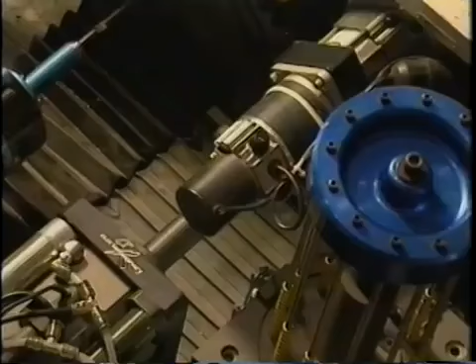It would be one of the most complex machines ever built. It would take 10,000 people and nearly 5 years to build it. It would cost an estimated $5 billion. Success was anything but certain. The plane would contain more than 4 million parts, supplied by contractors around the world.

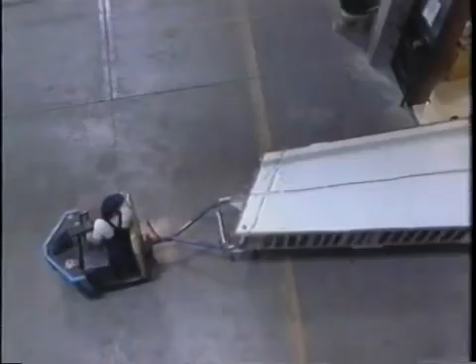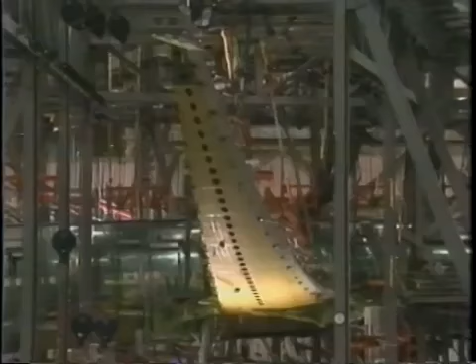To make it all work, the company would reinvent itself from the inside out. And all of this would have to happen at a time when the world's airline industry was in recession. If the 777 were to fail, the company's future was at risk. Success would keep Boeing ahead of the competition for decades to come. This plane would be built to set a new standard for commercial aviation. This is the story of the building of a 21st century jet.

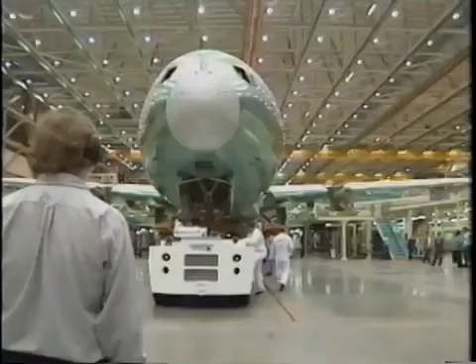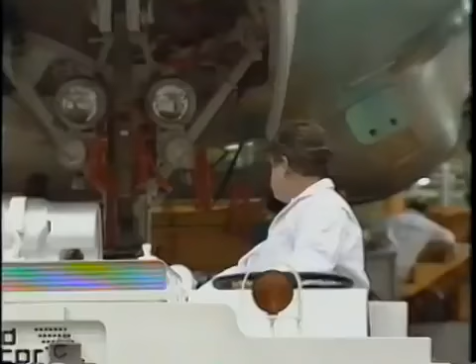1993 had been the year of assembly for Boeing's new airliner, the 777. In the space of a year, a whole plane had come together in the factory. By January of 1994, the plane was moving for the first time on its own wheels. It was a delicate operation. A team of wing walkers made sure the tow driver avoided bumping into walls, tools, or other aircraft. Because I can't see the end of the wing tips. If I get close to something, they'll let me know, warn me, or we have to back up and try again.

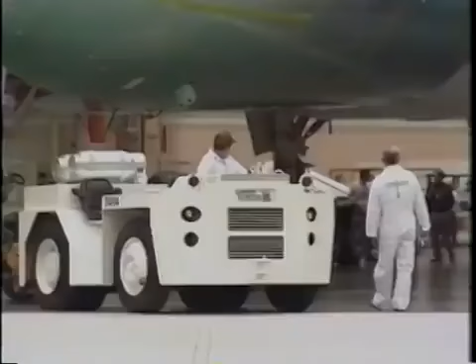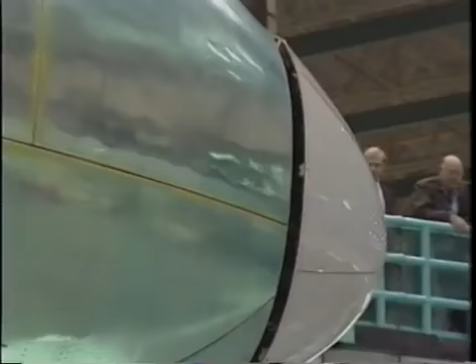Boeing had so far received orders for 140 planes. They hoped the 777 would ensure the company's commercial success well into the 21st century. But no 777 had yet flown. This one would be the first, and there were only 5 months to go before this aircraft would take its first flight. It would be 5 months of pressure, stress, and shifting deadlines.

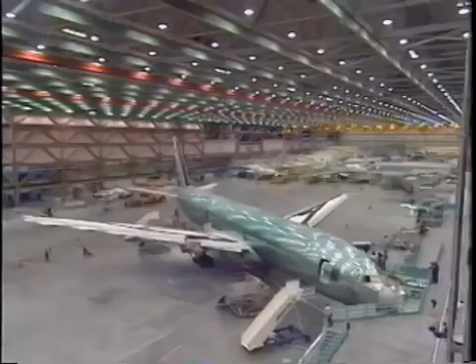This plane marked a change of direction for Boeing. It had been built with the latest technology, new flight testing, and a pioneering new management philosophy. Now, the plane was ready for those who would prepare it for its first flight. Now that a space had been vacated, the number 2 plane would be moved into position for assembly, followed by other planes farther down the line.

There was one important component still missing from the plane. In fact, 2. The engines. They were being designed and manufactured by other companies and would be brought to the plane just a few weeks before rollout. Boeing makes airplanes, but they don't make airplane engines. That requires a technology all its own. Pressure to design and test the 777 engines would dominate the run-up to the first flight.

Granville Frazier was the Boeing executive responsible for working with the engine manufacturers. Raised on a farm in Mississippi, he was known to his colleagues as Granny. Did it change anything from the meeting we had this morning? When I used to go back home and visit my relatives who are still either working factory-type jobs in the city or still work on the farm and actually grow cotton and corn and things like that, they used to ask me, and I'll try to lapse back into my childhood accent, they say, "Granville, what you do out there at that Boeing?"

And I'd say things like, well, I manage the business and technical interfaces between the Boeing Commercial Airplane Group and the various engine companies, Rolls-Royce, Pratt & Whitney, and GE. And invariably they'd say, yeah, but what you do? I finally learned to answer the question, I make airplanes. And they say, oh, you're a riveter or a welder? And I told them my job is more like welding.

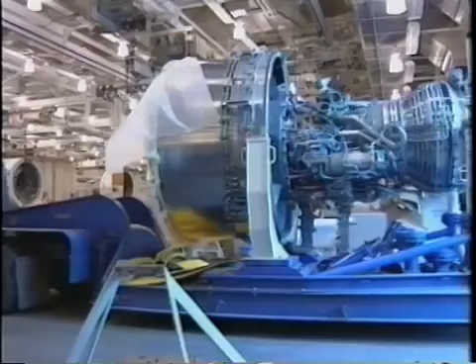And so you have a lot of communication. You could hear somebody say that occasionally. Granville's got a nice job out there at Boeing in Washington State. He's a welder. Welding relationships with the engine manufacturers was Frazier's main task. It would require all of his tact and skill to keep the engines on schedule. The first plane to go into service with United Airlines would have engines made by Pratt & Whitney.

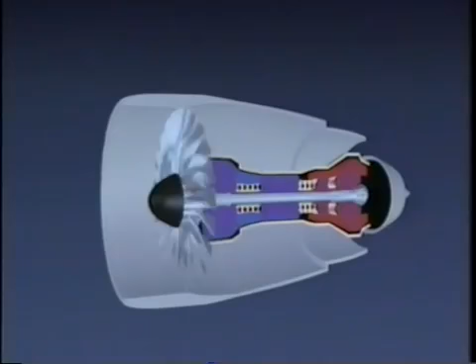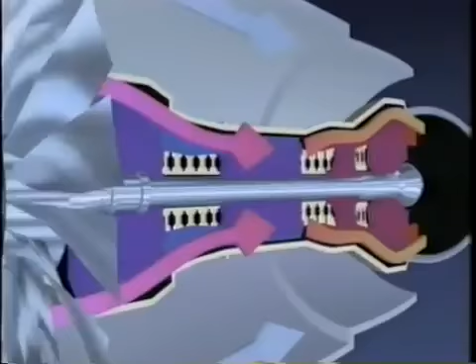According to engineers, a modern jet engine works by a process of suck, squeeze, burn, and blow. Air flows in at the front end through a series of rotating compressors fixed to a shaft. When the air pressure has increased about 20 times, it's heated in a burner at the back.

The hot air rushes out, turning the turbine blades, rotating the shaft at high speed, and spinning the front fan. This pulls the plane through the air like a propeller, except much more powerfully. The design of the new engine produced fierce technological challenges.

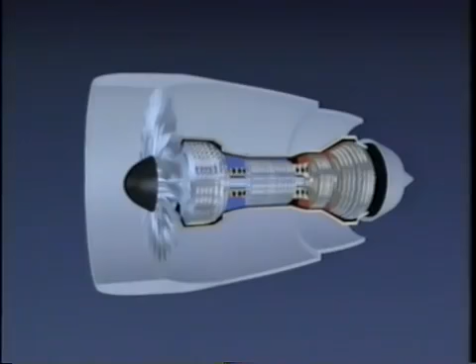I don't remember how many parts there are in an engine, maybe 50,000. And they whirl in a circle with tip speeds on the fans that are transonic, with turbine materials that are running at sufficient temperatures that they're running cherry red, and they all fly in formation with the airplane. The propulsion system, including the engines, is maybe 25% of the price of an airplane. It's a big chunk of it.

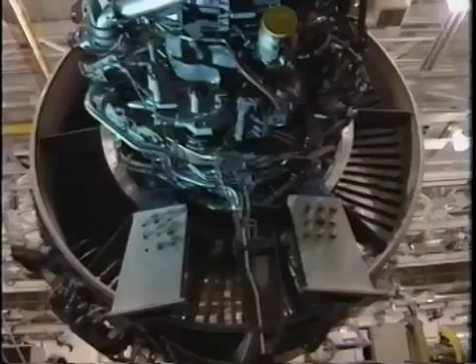There were 3 companies making engines for the 777: Rolls-Royce, GE, and Pratt & Whitney. It would be up to the airline to choose which manufacturer they went with on their airplanes. As with the rest of the plane, the engines were designed using a 3-dimensional computer. Every component stretched the limits of technology. The contours of the fan blades, for example, were angled to within 1/3 of a degree.

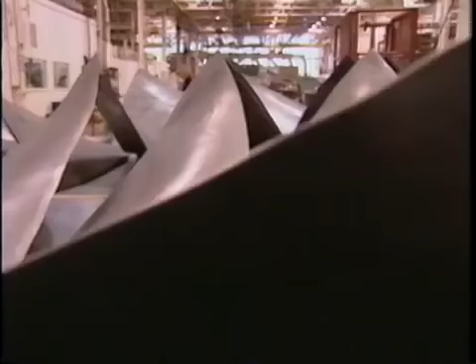Because the outer portions would move fastest, they would have to be larger to take in the same amount of air as the slower parts of the blades near the shaft. A steady and even airflow throughout the engine was crucial.

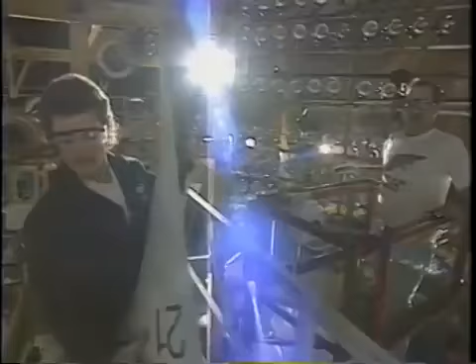As the core engine was designed and half a dozen prototypes built, Pratt began a test program that put the engines into test chambers where they would run for many hours under simulated flight conditions. Pratt used low-pressure altitude chambers and wind tunnels where engines could be run at full thrust in situations that simulated normal and abnormal flight.

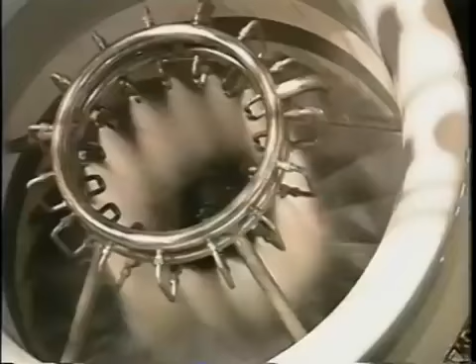The engines would have to be able to survive the onslaught of everything from large chunks of ice to torrential rain, rain falling at the equivalent of 28 inches an hour. Bird strikes had caused crashes in the past, so the engineers fired flocks of small birds, dead ones, at the engine, escalating to birds weighing as much as 8 pounds.

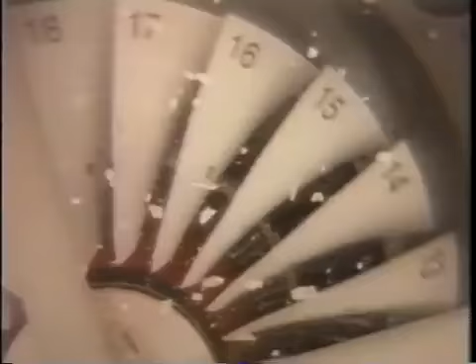The more dramatic tests took place in specially constructed indoor test laboratories. But Pratt & Whitney also had an outdoor test facility for running engines for weeks at a time at high thrust. It was in a location where it wouldn't disturb the neighbors.

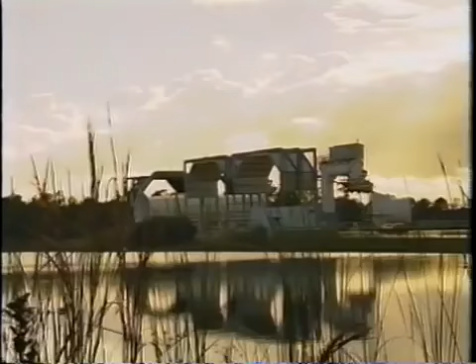When you go into reverse, you kick up a lot of sand and dirt, and you just tear up the test stand. So we run it outside for that reason. That's the primary reason. And the other secondary reason is that you don't wake anybody up out here when you're running all day long.

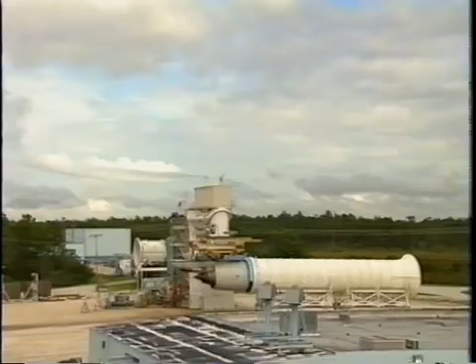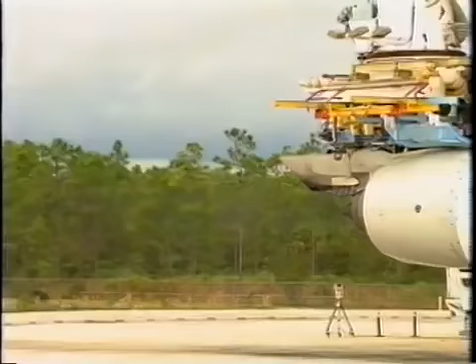These regular cycles of engine activity were designed to reveal problems related to fatigue or vibration that might occur once the engines had been running for a year or two in regular airline service. When an engine had to be shut down in flight, it was often because some small component had broken, leading to the plane having to land at the nearest airfield.

Over 50% of engine shutdowns had nothing to do with the core engine, but were the result of failures in the sensors or tubes around the engine. During these tests, the engineers deliberately changed the distribution of weight in the engine to put it off balance. This simulated the sort of vibration an engine might experience after years of wear and tear. After regular cycles of activity, engineers went in and took the engine apart.

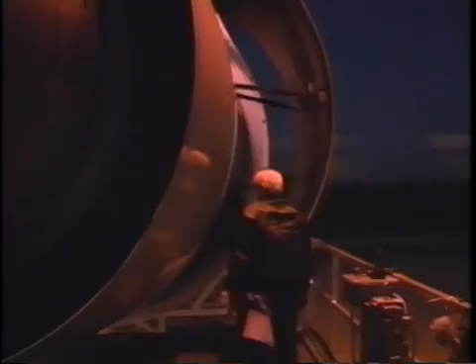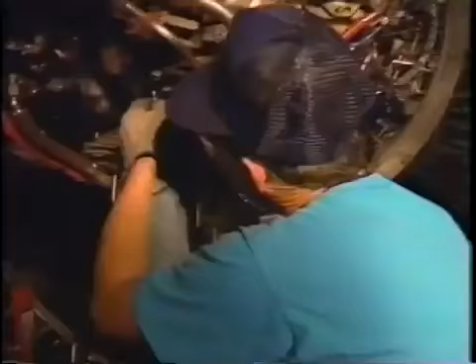And then on this side here, there's two other spots. They hoped not to find too much wrong, since these components had all been designed to resist the effects of vibration. Scott Hadley designed a drainage tube that surrounded the turbine case, attached at various points. Under certain engine conditions, the individual sections seemed to vibrate too much.

The engine, when it's running, if it has some off balance to it, such as the tire on your car, sometimes if your tire is off balance, you feel some shimmy in your steering wheel. And if you're at the right speed, and this tube system is tuned to that same frequency, it can amplify that vibration that's being input.

The key thing was to avoid having sections of the tube vibrate with the same frequency as the engine. Like a tuning fork, this section, in the middle of the screen, had a natural frequency that depended on its length between the brackets. By moving the position of the brackets, the designer could change the amount of vibration so the engine could no longer shake the tube apart.

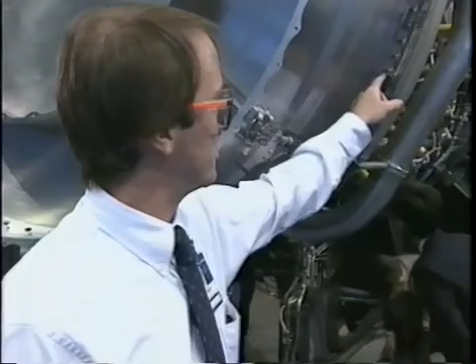And as a final check, Pratt had built a rig for the engine that could vibrate it at different frequencies. With the help of a strobe light, they could catch any piece that still vibrated too much, changing the position of a bracket to damp it down. When the first engines emerged from the factory, Scott Hadley's tube and brackets were nestled in their final positions, as firm as a rock, he hoped, in spite of any vibration.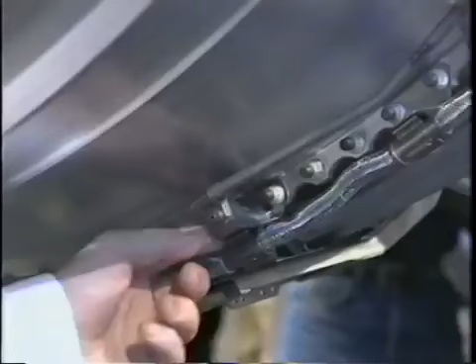It was this fitting down here that we saw had the mode of vibration right here. And by better supporting that, we'll be able to eliminate that mode of vibration in the engine operating range.

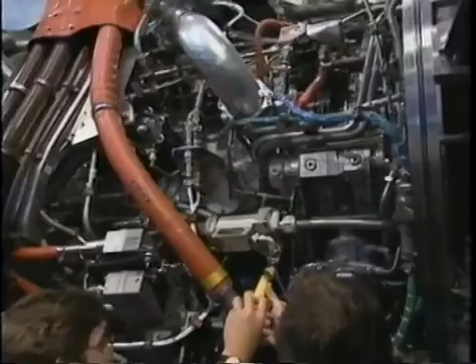Other engine problems occurred during regular in-service maintenance. Bad design could increase the chance of human error. So while they were still designing the engine, Pratt & Whitney opened their doors to engineers and maintenance staff from the airlines, encouraging them to swarm around the engine and look for problems. For many, it was a new experience.

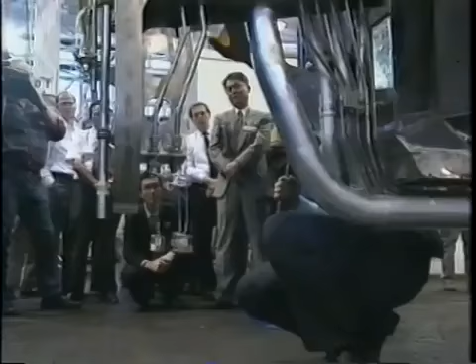I guess everybody's initial impression is the size. It's a much larger engine than we've ever seen before. We have access problems. We have some problems too, even with damage with the engines mounted so low on the wing. And we've had problems in the past just with the size of the engine and accommodating in stands and engine changes, working on the engine, that sort of thing, sure.

See what I mean? So we now can't change the primary without removing the plug, which I'm not sure if that's a forward step or a backward one, really. How do you know for sure that valve is shut? Oh, how do you know that it's shut? Yeah. I think it bottoms out, doesn't it? When you turn it 270 degrees, it bottoms out. Like, which way to turn it to open it?

This is another thing we've had trouble with over the years, these captured fasteners. And, you know, when you're outside at midnight and it's 10 below zero and this thing falls out and goes through a sewer or something, you go try to find another one. I've always wondered why they couldn't just put a bolt in there, you know, it'd be so much simpler for us. It was an unprecedented process and helped with the marketing of the plane, persuading potential customers that they would have a more reliable plane than ever before.

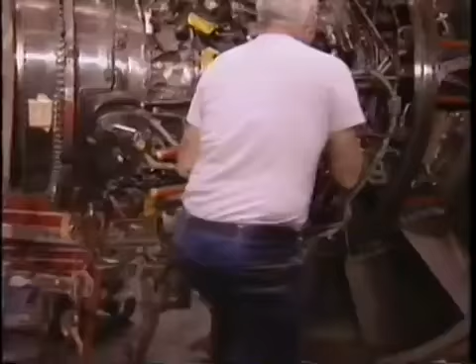By autumn 1993, the engineers had developed a high degree of confidence in the engine design. Some thought the engine was ready to fly on the 777. Others argued that ground tests were not enough. As with past engines, these new engines should first be installed on test planes, called flying test beds, so they could be tested under actual flight conditions. The arguments went back and forth.

We have not had any experience with an engine of that size, so I was in favor of a test bed, at least for this first engine, to find out after they've done their ground test and their simulation of flight in an altitude chamber, that would correlate with in-flight test data by actually flying the engine. That, I felt, would give us a good deal of confidence in the test program. But to lease and specially adapt a test plane for several months would cost something like $10 million. Some felt it was an unnecessary expense.

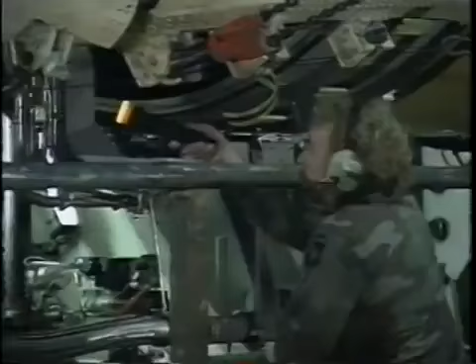We still feel that, technically speaking, we have the ability now to acquire consistent data from a ground-based wind tunnel environment. And so we're kind of experimenting with that possibility now with this program, in the sense that we seriously considered not having flying test beds for our engines. To be quite honest with you, I recommended we didn't. I recommended we were ready to do that.

Like all important decisions on the 777, everyone had his say, and then a decision gradually emerged in favor of the flying test bed. You know, we all listened and we all talked about it, and we decided, well, it's a big development program, and it's a big change, so why don't we go check it out on the airplane, and then we'll validate that correlation between the ground facility and the flight test.

And then if it turns out that we really do understand it from the ground facility, then we won't fly subsequent engines on flying test beds. So I think both people will be right, kind of. The team began to plan the engine test flights. The plane they used had an unusual history.

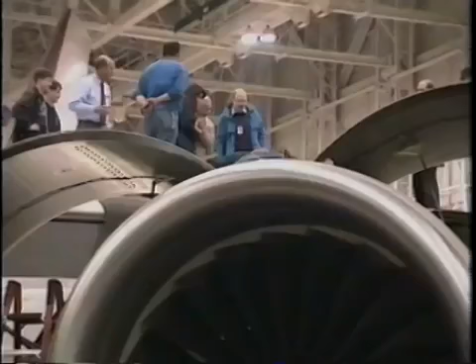The 777 engine requires a very large airplane. And basically one of the only commercial airplanes today that can do that is a 747. So we've used our 747 prototype airplane, which was the original 747 that was built and flown in February of 1969. We borrowed it back from the Museum of Flight, which actually is now the current owner. The 777 engine would have twice as much thrust as the 747's regular engines. It gave an unbalanced look and feel to the historic plane.

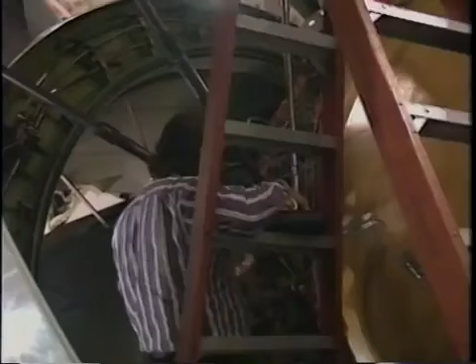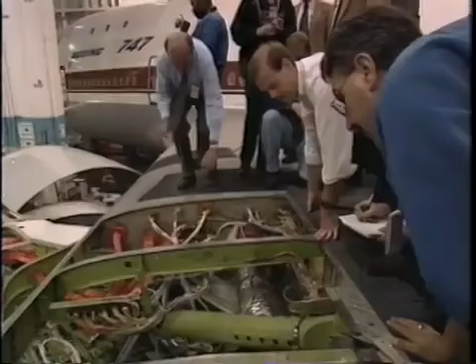It's like it bottoms right there. Yeah, it bottoms. That's that additional play that allows it to move on out. Probably, yeah. As they finished fitting and checking the engine, the engineers were quietly confident that they had done all they could to give the flying test bed a smooth send-off. They were entirely unprepared for what happened next.

The tests began slowly and gently, starting with lower thrust levels as the team got used to the effects of the larger engine on the plane. Then on the third flight, something unexpected happened.

The dramatic explosion was something called a surge. It was similar to a car engine backfiring, and it happened because the pattern of airflow through the engine was badly disrupted. What happens, and particularly at high power, it's very noticeable in the flight deck. It's a very large explosion that you hear. It's like a shotgun going off. Usually there's a motion in the airplane where the airplane will turn slightly into the engine that surges.

The takeoff surge that we had on RA001 was certainly an unexpected surge. You never expect the engine to surge at its takeoff power during rotation. That's not something that you want to ever see. The 777 was 7 months from its first flight, and Boeing and Pratt knew they had to work quickly to find the cause of the surge and fix it.

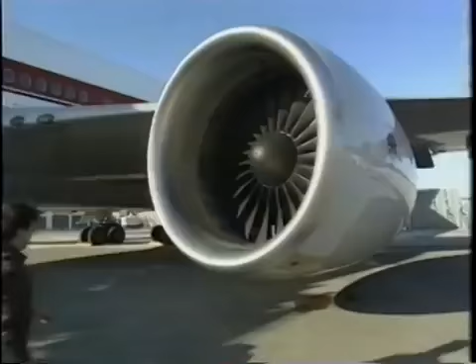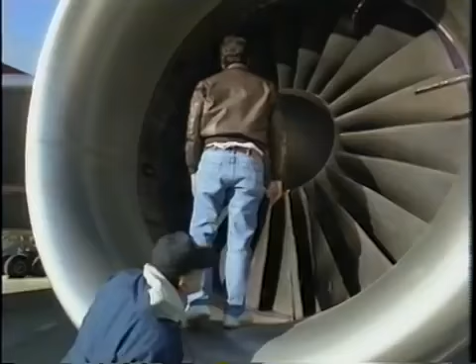For many of the engineers, the surge was a setback. Alan Mulally insisted on seeing problems uncovered during testing in a positive light. It was a gift, which was good news. It was a good piece of data. And following analysis of the engine and looking at the test data that we gathered, we realized that the case that surrounds the fan blades needed to be a little stiffer because it was moving a little bit more than what we had in the design, and that allowed a little bit too much clearance between the tip of the fan blades and the case, which allowed the fan blades to stall just like an airfoil.

Now, we could have gone to flight testing on the very first airplane without this fix in, and it would have been okay, but it would be a lot more efficient if we could get the new components made, get them retrofitted, and put them on the airplane.

For the group that had supported the idea of a flying test bed, they appeared to have been right. We had hoped they would be able to find this kind of a problem on their ground testing. It would have been one that would have more likely been found in the Florida test facility rather than the altitude chamber, because it has to be done at extremely high power. And at this point, I really don't know why they didn't find it or what the characteristics were. So, obviously we're looking at that. But having a test bed does give you the opportunity to discover things like this.

For Ron Ostrowski, who had originally been against the idea of a flying test bed, the surge had made him think again. In hindsight, I had a lot of advice from others, and it was good advice. Because given where we are today with what I said earlier about being somewhat behind in the schedule relative to the validation of the engines themselves, if we had not gone ahead with the flying test bed, had just made that decision on the basis of where we were a year ago, we would be concerned about our position now. We would be concerned about it.

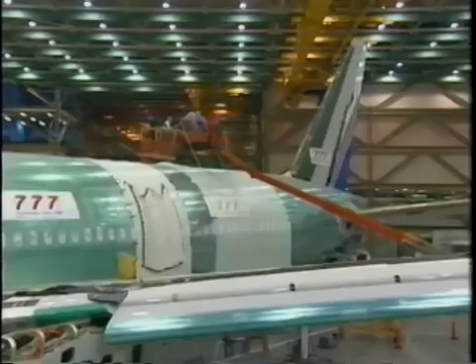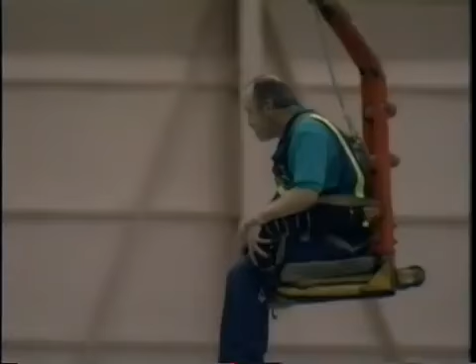In the test, engineers increased the pressure by pumping air into the passenger cabin and cargo hold, inflating the plane like a balloon. This was because on the ground, they couldn't decrease the pressure around the plane to simulate high-altitude conditions. The fuselage had to be able to withstand a pressure difference of more than 12 pounds a square inch.

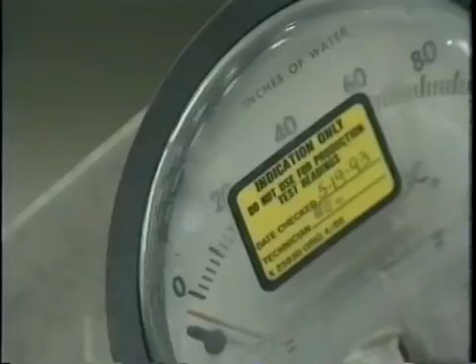We start out at 5 PSI, that's what we go to. It's a preliminary check. And then we'll come down, we'll let people out of the airplane at that point, and then we'll go up to 12.1, which is our proof test. 12.1 PSI, that's per square inch, you got to realize. You may see some leaks around doors, things like that. They're audible, very audible if they're leaking.

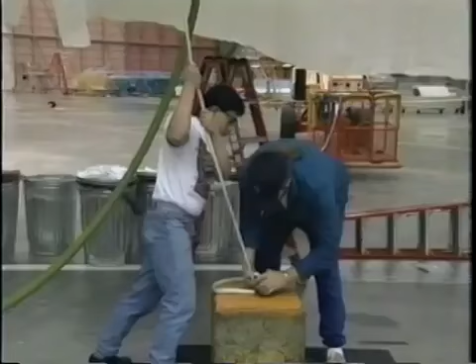You'll hear them. If you have a head cold, anything like that, do not enter the airplane. On the way up to pressure, clear your ears like this, chew gum, whatever you need. Your ears will pop. If we start going up and your ears do not pop, let us know on the radio. We'll bring it down and let you out. We don't want your ears ringing in there. No earplugs at all. It may be noisy in there, but do not wear earplugs.

Okay. When we go to 12.1, I want everybody in the 26 building. I don't want them over here on this beam. Okay, now we got contractors in, you know? Not that I'm aware of. 2 o'clock. Okay, FAA is here. So is customer coordination. They understood that they come in, they got to stand by till we're ready. Everybody's good? Okay, so we're ready to go, right? Yes. Okay. Go ahead, Harold, take her up.

Everything held up under 5 pounds per square inch. Then pressure was increased toward the test limit, 50% above the maximum in-flight pressure difference. That's a good sign. No plastic blowing. They hoped the plane would hold a pressure difference of 12.1 pounds per square inch without leaking. He will time the 5 minutes. But the optimism was premature. As the pressure difference reached 12 pounds per square inch, the seal on a rear door gave way. There it goes.

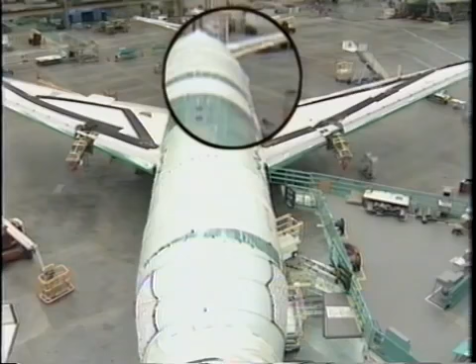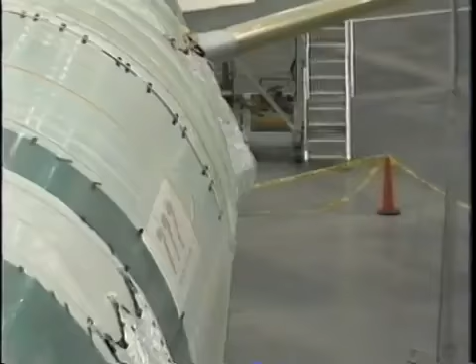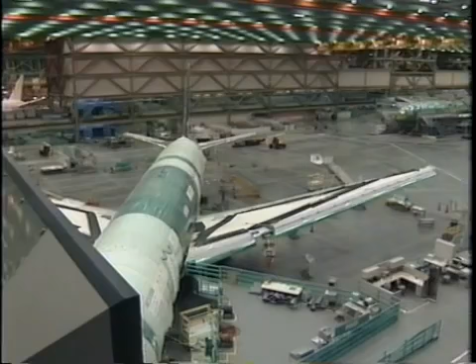See if you can hold it. We're going to try to get to 12.1 and hold. Okay, we know we're going to try to get the proof and hold it. The engineers kept the air pumping, hoping to keep the pressure up to what was called proof, the target pressure difference. I don't know. We're talking about it. Can't hold it? Okay, we're not going to hold proof. We're dropping it. Drop her, Harold. We were real close. Real close.

What was the airplane doing? It was climbing up? We were climbing real good. How high? We were only going 1,000 feet per minute, but we were at 12.0. Then it blew. If this starts moving out here, I mean, it rotates. Right. And it can rotate at this point. Right, and then it just flops and it's out. Yeah, at a certain pressure, it'll just flop out. Either way, it's going to rotate around this point here. Let's go up and take a look and see what we got.

The aim was to create a temporary seal for the defective door with tape and tubing so the rest of the plane could be tested. Like I said, it's going to rotate around that point there. What we're going to do is fill this space so the seal has nowhere to go. With what? With Tygon tubing. It'll be trapped by the skin and it'll have nowhere to go. Okay, let's take a break. Well, that's got air.

The temporary fix worked. And later that night, the plane was repressurized and reached 12.1 pounds per square inch without leaking. In the following weeks, the door designers were able to identify the weak point in the complex silicone rubber seal and fix it.

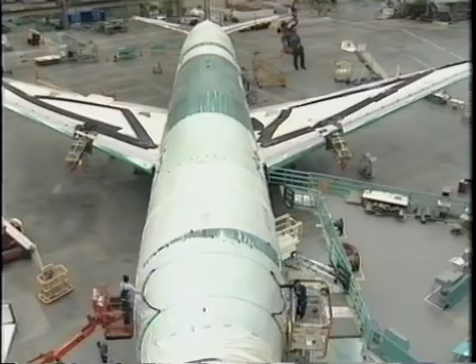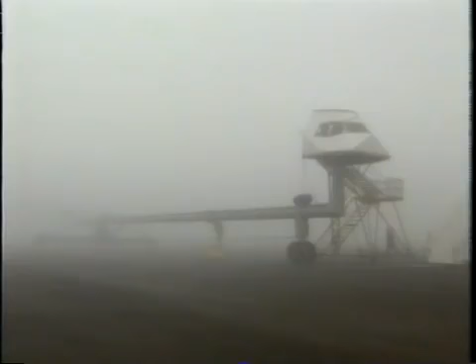A few days later, on a nearby airfield in the midwinter fog, John Cashman was preparing to pilot an unusual Boeing vehicle called LEGOS. LEGOS stood for Large Airplane Ground Operations Simulator. It was a cockpit on a stick, attached to a long metal framework on wheels. Its wheelbase was even longer than a standard 777's, as it was built to simulate the handling problems presented by a future version of the plane called a stretch, which would be 18 feet longer than the basic model.

Because the stretch would be so big and the cockpit so far forward, Boeing engineers worried that pilots would have trouble steering it around airports, so they built LEGOS. What we want to do is we'll dog leg over to the right. Is the van clear behind us? Tower, LEGOS is now clear. LEGOS ready. We'll just go off to the right here, Jim, and that's where we'll hit these 3 yellow stripes. Move to the right, yeah. And you'll eventually see 3 yellow stripes coming out of the fog here, the 3 stripes I described before.

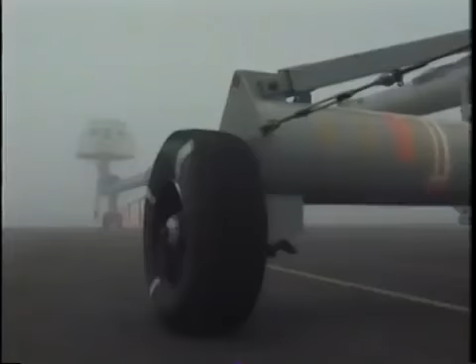About this heading. Head 270. Understand. I think they got that at Radio Shack or something.

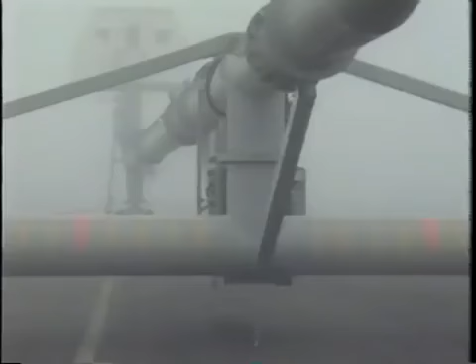Boeing had made several attempts at solving this problem before deciding they needed LEGOS. We did try using the simulator, which is very good for a lot of things, but in ground maneuver situations, it was felt it didn't give an accurate enough picture to the pilot to really tell whether the maneuverability was acceptable. And we did do a test last year at Moses Lake using a 757 on taxiways that were scaled down in size. We actually built 60% size taxiways and taxied the 757 around that.

All of those sort of pointed to there might be a problem, or you might say they were inconclusive anyway. They didn't convince us there wasn't a problem, so we decided to go ahead and build this, which is about as close as we can get to the airplane without actually having the airplane. One test involved video cameras mounted on the wings to show the pilot where his wheels were. Because any invention like this could give the company a competitive edge, Boeing kept the system under wraps until deciding whether or not to use it.

But as the LEGOS pilots addressed a problem that didn't have to be solved for another 2 years, the engine team was dealing with more pressing problems. By this time, the first flight was just 6 months away, and the 777 still didn't have a pair of engines that everyone was happy with. The surge had necessitated a complicated redesign process, all of which took time. The pressure was mounting at the weekly video conferences.

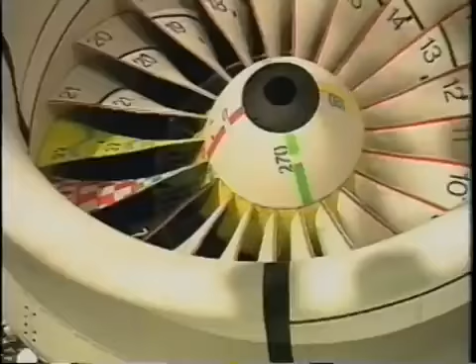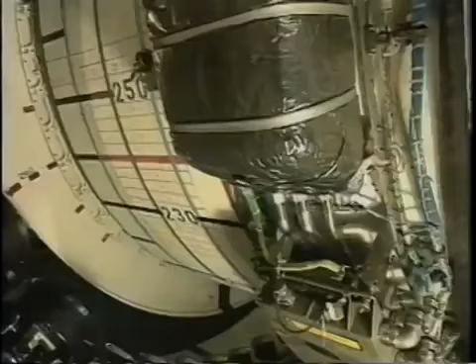In the test, an explosive bolt snapped off the fan blade at high speed. The engine case was surrounded by a 3-inch thick band of extremely strong material called Kevlar. It had to stop the flying fan blade, seen here in slow motion. The impact was equivalent to stopping a 5-ton car traveling at 70 miles an hour in 5 inches. Release the blade.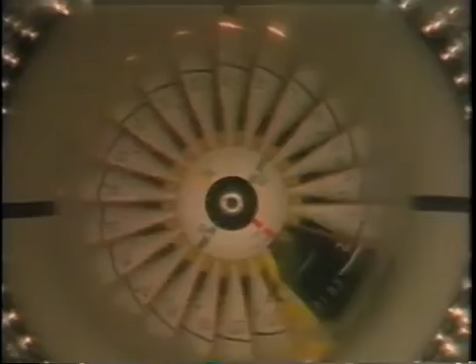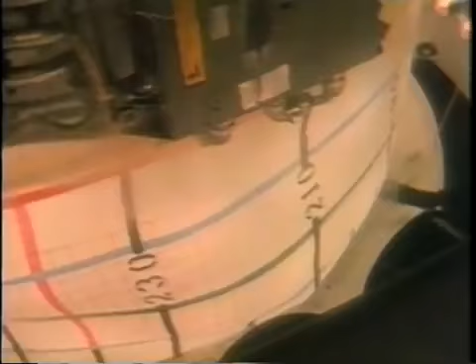The test showed that the engine blade would be contained, but it also suggested that the unbalanced engine, now short of a fan blade, might generate a shock wave that could buckle the turbine case. We determined that the low turbine case, which is the case on the rear of the engine that has all of the low turbine blades and vanes inside of it, needed to be increased in wall thickness to make it structurally stronger. The Flanagan brothers were in the process of machining this case for our production engines.

When we went to the Flanagan brothers and said, we need to get casings that are made thicker, machined thicker, and have those casings available for the first flight of the 777, the Flanagan brothers came to our rescue. The knight in shining armor was Jim Flanagan. His workshop was housed in a small factory in the sleepy town of Glastonbury, Connecticut.

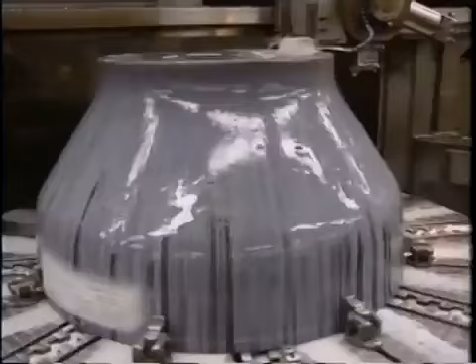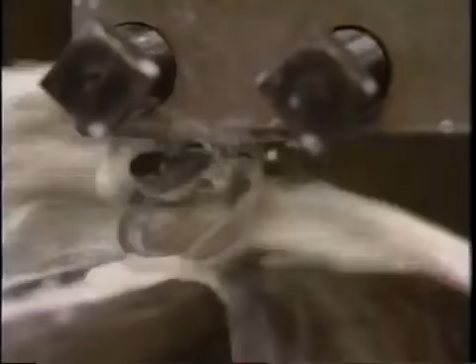Flanagan had been working in metal for 56 years. He started in high school producing copper fruit bowls, which he sold to local shops. His company was now being asked to produce bowls that could house jet engines. The engine cases started as roughly shaped bowls of nickel alloy, each weighing over 4,000 pounds and measuring 6 feet in diameter. When Flanagan Brothers was done, the weight would be reduced by 90%. It requires several different fields of expertise to manufacture this part.

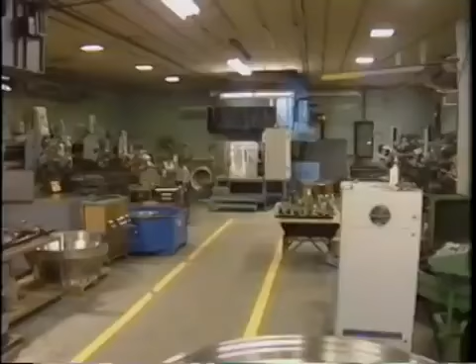First of all, it requires capability to turn larger diameter parts and exotic metals. This particular part is made out of a very strong material where the material will stand high degrees of heat and still not distort. It also requires drilling and milling and some exotic grinding, which is done with what they call borazon wheels. And it's not at all conventional. It's a very special type of grinding that's done on these particular parts.

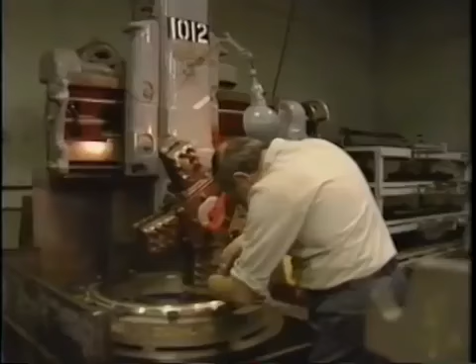And we had those capabilities, and when we were quoted on the case, we were able to come up with a competitive price and good delivery. And we are right now depending on the Flanagan brothers to get us this case so that we can have the engines built with the latest design ready to fly on the first 777. So you can kind of look at these giants in the aviation industry, the Boeing company and a little smaller giant, Pratt & Whitney and United Technologies. And it's all hanging on the Flanagan brothers and their ability to machine this case.

For Davenport at Pratt & Whitney, the new turbine case was just one of the numerous last-minute changes threatening his company's ability to deliver the engines on time. The date is sacred, and that date happens to be April 20th. And between now and April 20th, my hair gets gray, and we get emotional.

The problems with the engine were a severe test for relationships between Pratt and Boeing and inside Boeing itself. Sure, the first two engines for Airplane 1 were probably 4 weeks behind their scheduled delivery date to the Boeing company, and that's my responsibility. So I was the one that not only had to tell Granny, but I had to tell Alan. And it created a lot of problems for us. We had to do a lot of workarounds, and it disrupted a lot of our other schedules, but comes with a job.

Sometimes there's a short-term reaction where you respond to the one definition of stress. That's the terrible feeling you have when you need badly to strangle somebody to death and you can't. There is the fear that you have for a moment that the problem you've run into is unsurmountable and you won't be able to find a way through the labyrinth to get that thing done which you need to do. We get through those first two pretty quickly, and the whole team goes to work.

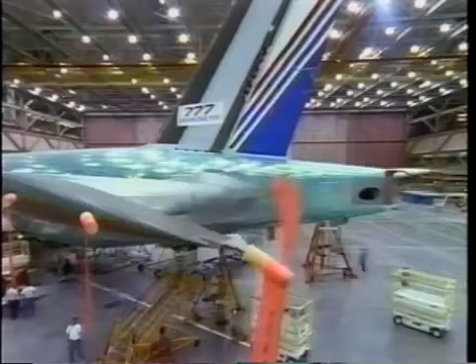But in the assembly building, work raced ahead on the new airplane. This first plane would only be used for test flights and would never fly for an airline, so Boeing painted it with the company colors.

Not yet. Not yet. Soon will be. Are you gonna actually roll the plane out today or what? You know, it's a surprise because I don't know. Oh, you don't know what they're gonna do either? Yeah, sir. I don't know what they're gonna do exactly. I don't know whether they're gonna roll it out or just unveil it or what. If it's anything like they've been in the past, it's gonna be.

50,000 Boeing employees and their relatives were invited to the rollout ceremony. Included was Glenda Barnes. Her job had been to put sealing compound around the inside of the plane's fuel tanks. To get into the gate. What you told me to get my badge? Because one ticket and one badge. A Boeing badge must be escorted with one ticket.

I got the Boeing fever. It's time to go. Got Boeing fever now, I got, huh? Boeing fever.

Over and over during the course of the day, thousands of people were brought by bus to the factory where the plane was revealed. As the plane was unveiled, it looked deceptively small. In reality, it was only slightly smaller than a 747.

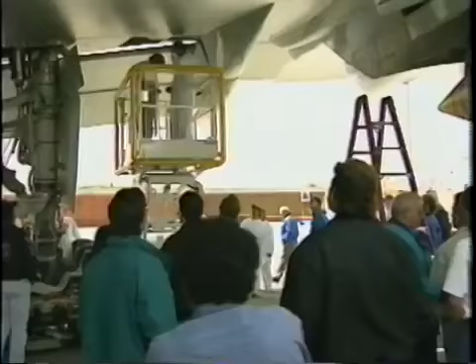All stations, this is 777-1. We've had a hydraulic leak on the left side of the airplane, and we've shut down and are opening doors here to investigate. Stand by here for an estimate of how long we're going to be.

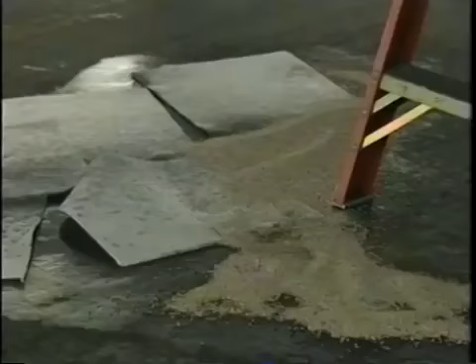There was a leak in the hydraulic power system that moved the huge flaps on the wings. Yeah. Although there were several backup systems, it had to be fixed before they could taxi. When they finally got going, one key test would be to see how the plane responded if crosswinds pushing on the plane's tail created a sideways pressure on the nose landing gear. Cashman came down to discuss this with Mulally while they waited for the leak to be fixed.

With a yaw, and then I'm only going to wait a couple seconds, maybe one, before it's coming down, I hit the brakes again. Is it coming down with the yaw for side load? But for them to check side loads, or for you to check what it feels like on landing? No, for them. It's to try to induce shimmy on the nose gear. At high speed, they want to spin up with a side load and see if it shimmies.

And that's part one. And part two is just hit the brakes, and with one brake deactivated, that puts a torque on the gear, and they can look for shimmy stability on the main gear also. Oh, and we're trying to do that on one run. Oh, that's neat. Because once we get off that condition, I've got to use almost max brakes to get stopped. Why don't they do it with a rudder input or a wheel input? You can't do it at the high speed. It is a rudder input.

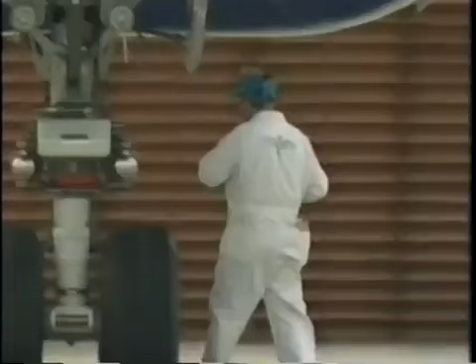The cause of the leak was discovered, a small rubber O-ring that was pinched at the junction point, leaving a gap for hydraulic fluid to leak through. The O-ring was replaced, the engine started up again, and the crew went through their final routines. Under its own steam, the first 777 made a quick right turn and headed for the runway.

South on Alpha down to set up by where the crash truck is this side of Bravo.

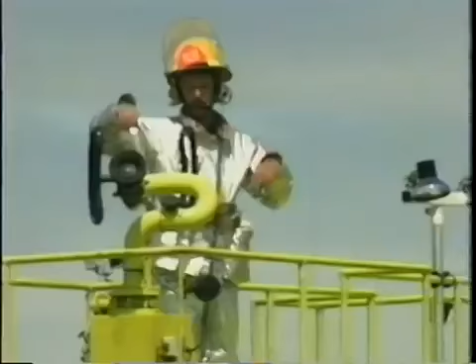These taxi tests would check the operation of the landing gear, the heating of the brakes, and the stability of the whole plane. John Cashman would take the plane up to 140 knots, lifting the nose off the ground. Any faster and the plane would take off, an event that was supposed to wait until the following day. But at peak speed on the taxi, there was a surprise. It appeared for a moment that all the plane's wheels had left the ground. Had first flight been a day early?

Okay, well, what do you now say? Let's repeat in unison. First flight is tomorrow. Yeah, tomorrow. It didn't happen today. It did not happen today.

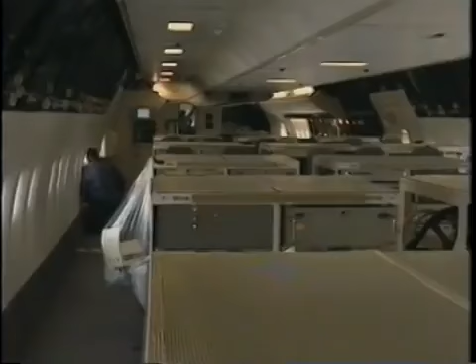At the briefing after the tests, Cashman reported on how the plane had done. He finished up with a problem all too familiar to anyone with a car: noisy brakes. No, this happens every time you get probably above 3 to 4. It's kind of a grindy, low groan just before you stop. Thank you, everybody. It was a good test. Thank you very much. I think we're there. We can't test any more on the ground. That's great.

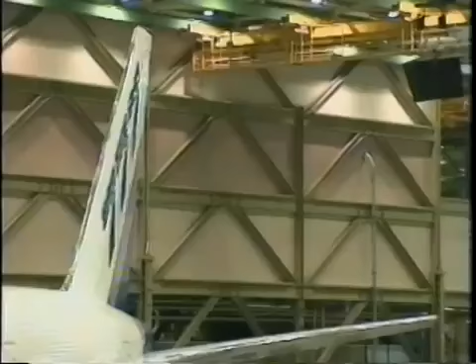There was no disguising the impatience of the team. The day they'd been working towards for 4.5 years had almost arrived. The next day, Boeing's prototype 777 was scheduled to fly for the first time. The plane would be checked and rechecked through the night. For in the course of this $5 billion enterprise, this flight would be a milestone like no other. Success or failure would be riding on it.